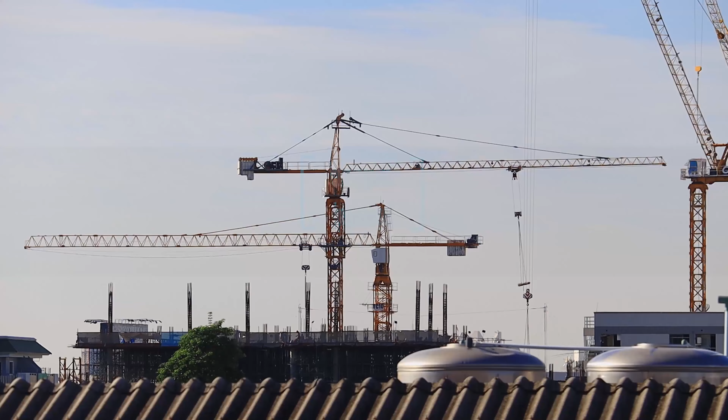Basically, these days, the trends are really changing when I talk of structural engineering. I understand most of you are into structural engineering, which is the analysis and design part. So I would say, with the given time now, these definitions of what a structural engineer is supposed to do are changing a lot. A structural engineer is not just confined to doing the load calculations, analysis, and designing the reinforcement and member sections and all.

So the scope has really increased in today's world. So many interdisciplinary things are coming up, and the way infrastructure has become so advanced, techniques have become so advanced, so the structural engineer also has to keep up to this. But of course, we have to understand that structural engineering is a very old art. It is one of the basic engineerings, I would say. Civil engineering is a very basic engineering.

Humankind, as we know from ancient times, had to build their homes and everything. So this art has been known to very ancient civilizations also, and we see these structures, which are all testament of the kind of skill a structural engineer has been having, and they're still standing today. We are talking of 2000 BC structures, and they're still there. So this is nothing but structural engineering.

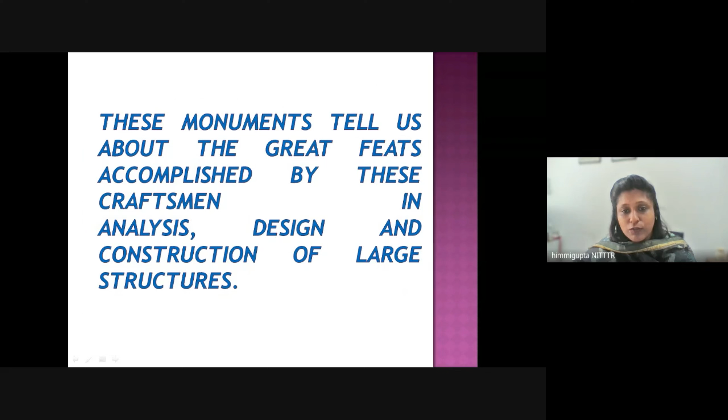Great buildings we still see: Sanchi Stupa, the Athens building, 2500 years old, Taj Mahal, 350 years old, then the Eiffel Tower. All these are marvels that speak of what a great profession structural engineering is, what kind of accomplishments we have been achieving. And in today's world also we can see how structures are coming up. We see houses, bridges, flyovers, high rise buildings, spacious shopping malls coming around us, and they're all structural engineering marvels. There's so much going into it.

So a structural engineer has to think about it; creativity is always there, of course, but we have to start bringing it out in terms of aesthetics also. Engineers, we are creators of artifacts. Original thinking has to be there, but again, constraints are put. You have to have affordability, economy, and practicability is another very important aspect. We have to tell all structural engineers that whatever you design, it should be practically possible to construct it on the site.

Okay, so now the modes are changing. We have to also understand about financing, project management, information technology. We see so many smart things coming around us. That is all IT, which is getting involved in the buildings, the structures. So, as structural engineers, we cannot say that we don't want to get involved in this. These are part and parcel of a structural engineer now.

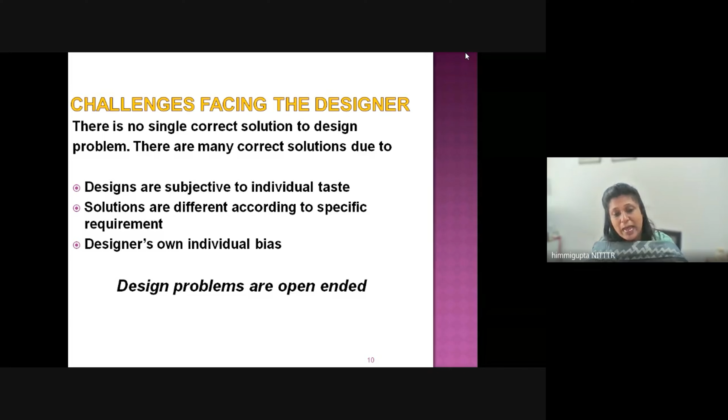There are many possible correct solutions. Of course, what comes in then is subjective design, which is based on individual taste and selected. Solutions may be for specific requirements, so the same solution may not be applicable everywhere. A designer has his or her own bias, their own subjective experience and thinking. So design problems are actually open-ended, with many possible solutions.

So within the constraints that we all know - cost, time, safety, and all those things - we have to come up with a design, an optimum solution. That is what is required. And that is where, these days, artificial intelligence is also coming up in structural engineering for optimization and these kinds of things. So we are not in isolation - any technology you talk of is now applicable for structural engineering also.

So this is a great profession. These are just words of a former president of the United States. Won't go into a lot of detail, but the idea is, what we civil engineers build and design stands in front of the entire community for the next 60, 70 years to see. So it has to be good work. We cannot hide our things under stitches, or hide our work under other things like other professions do. So civil engineering is something that is there in the open, and we should be very proud to show that yes, this is what we have done.

We cannot hide our work anywhere, it will be there. Plus we have this onus that people are using these structures, so safety of people and safety of property is another onus. I think the latest incident that happened in Gujarat, the collapse of the Morbi Bridge, has actually shaken everyone. That is a very classic example of what kind of big responsibility civil engineers have on them.

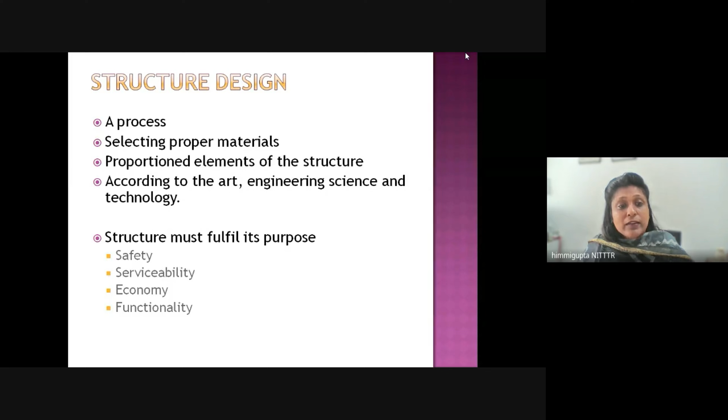We have to select proper materials, which is again another aspect where a lot of things can be done by a structural engineer these days. A lot of things are expected from a structural engineer - choosing the proper material. Then is the proportioning of the elements, and definitely it's an art, engineering, science - it's a technology. That's what we are using.

When I do structural analysis first, what I do is determine the effects of loads on the physical structure and its components, like the deformations, internal forces, stresses, support reactions, accelerations, stability. So basically the key part of engineering design of structures is the results - they are used to verify that a structure is fit for use. The idea is analysis helps us avoid some physical tests, which can otherwise be time consuming and very costly. So that's how analysis helps us.

Simulations, that's what we talk of, and these days these are becoming very common. I'll also share this as one of the recent trends - what structural engineers around the globe have started doing. We are using applied mechanics when we are doing all the analysis of forces, stresses, and everything. We are using material sciences - how materials are behaving, how concrete is behaving, how steel is behaving, any composite construction that we are doing. New materials are coming into the market these days, so all those things are related to material science, and applied mathematics is there too.

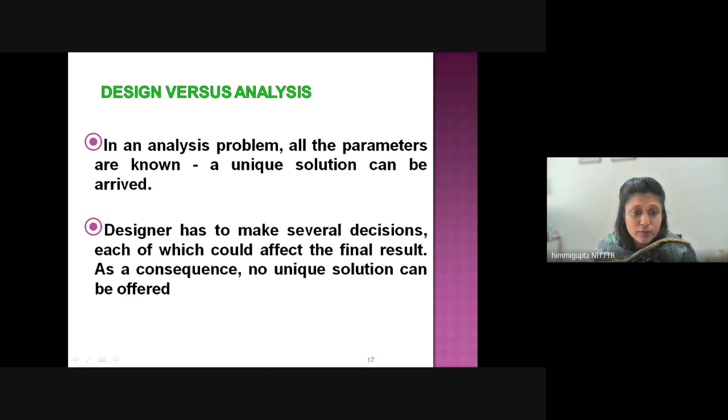When I'm doing structural analysis, I'm doing so many matrix operations, finite element analysis, solving so many differential equations, when we go for dynamic analysis and these kinds of things. So there's so much art, technology, and engineering involved for a structural engineer. Design, as I said, is open-ended, but in analysis we know all the parameters, and there is a unique solution. So these are the two differences between analysis and design. Of course, we have time limitations, cost and environmental constraints, and the building has to be fit for the purpose for which it is being built.

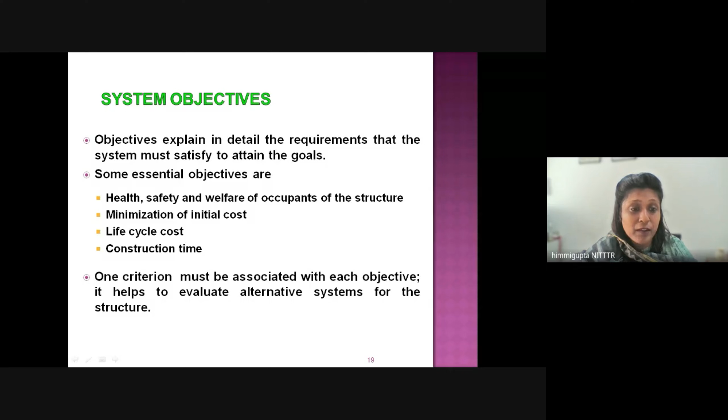Another very essential objective which has started coming up in recent times is the health, safety, and welfare of occupants. Especially COVID times have taught us how hygiene is to be maintained, how we have to keep everything clean and neat around us. Since buildings are used for so many purposes by so many people - in an office or college, we spend almost 8 to 9 hours every day. So health, safety, and welfare of occupants have become a core area of concern for a building, and the structural engineer has to get involved in this aspect too.

Then of course initial cost minimization is there, and another aspect which has picked up is the life cycle cost. One is the initial cost and one is the life cycle cost - throughout its life, what kind of costs will come. People have started looking into these aspects given the changes in environment that have come with excessive use, the way humankind has been tapping into the earth's resources. So we are falling short of resources now. Everything we choose - what material, what techniques - we have to look at their impact on the environment. We have to start questioning everything on that aspect.

I have to understand that I have to look for the best alternative solution if possible, optimized, which has all these things. Of course constraints are there for a designer. Sometimes the constraint is that the beam cannot go deeper than 200 mm. So we have to go for such design solutions to work within that.

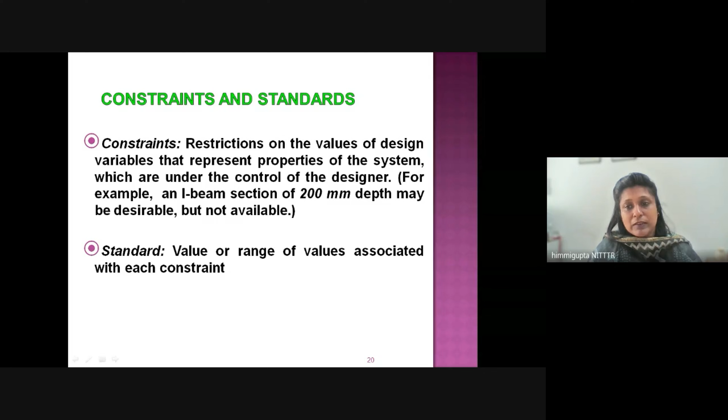Then there are standards, which are values or ranges of values associated with each constraint - like our IS standards, BIS standards, British standards, New Zealand standards, Euro standards. So basically most things are governed by that. The idea is to have some standard around which structures are built, so that these things can be regulated and there is some standard which is maintained.

Code specifications are of course helping us - they are the detailed set of rules and suggestions. As a structural engineer we should have due knowledge of all these codes, know how to use them, and know which are the applicable clauses for us. That's a very important part. If I'm missing a major load because I didn't look into the code and use it, that's a big oversight - I have overlooked something very important, and the structure is not safe.

Codes are formed by experts after a lot of research, adopted after seeing how buildings or structures have performed in the past, and these codes get revised regularly. So another important aspect for structural engineers is to keep themselves updated with the latest changes in codes - if some new revision has come, we must be aware and ready to use it. Recently, IS 875 and 1893 for loads were revised, NBC was revised, and very soon we expect a revision in IS 456, the code for RCC, which has also been long due. I think very soon it is expected to happen.

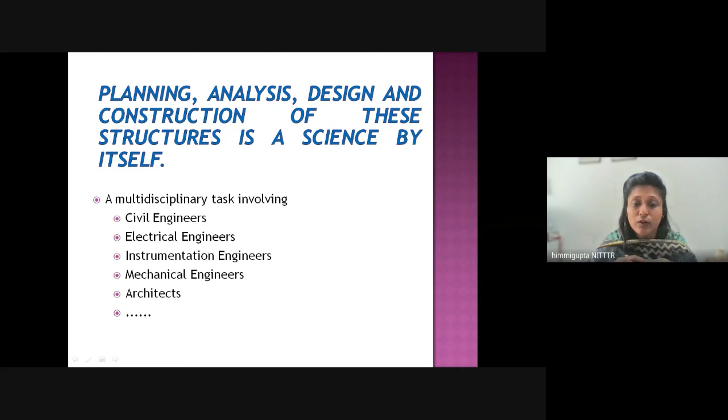Basically, we have to make it buildable. It's a multidisciplinary task - there is planning, analysis, design, and the way it has to be constructed. When construction happens, the structural engineer is always involved there too. The structure involves civil, electrical, instrumentation, mechanical engineers, architects, green consultants, regulatory bodies - so many stakeholders are involved, and everyone has to go hand in hand.

So, just starting with a few structural systems - there are so many structural systems available, which give us the variety to come up with such fantastic structures, the marvels. Definitely, knowledge of these structural systems is very important, and many of these keep on updating too.

We see high rise buildings, new types of buildings. We see signature buildings coming up, like the Signature Bridge in Delhi, or how they executed it. We have such beautiful bridges around us, new ones coming up, some have come up just recently. So new structural systems also keep coming up.

Of course, knowledge of basics is there, and of course how much creativity we can put into that. We have to see the feasibility, the functionality, the technology, and sustainability is the word. That's the need of the time, since our environment has been polluted too much by humans. So we have to keep in mind, whatever we build, what effect will it have on the environment. Our effect should be minimum on the environment.

Then innovation, of course, always has its plus point. Having innovation in any structure, as I said, can help in saving a lot of material also. Some new technique comes up, and with innovation, a good structure can become a revenue generator also.

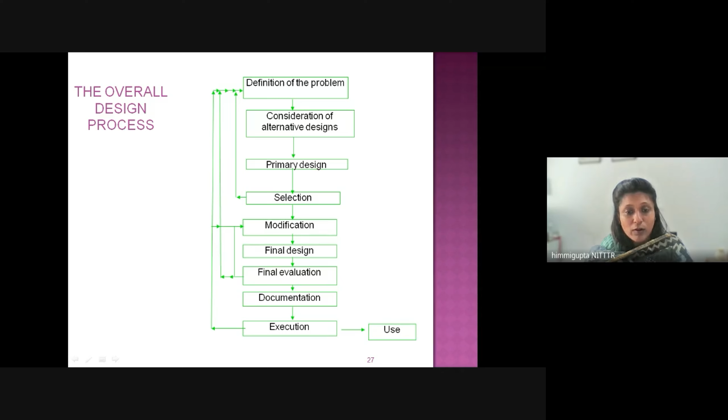Of course, the overall design process involves a lot of steps. We do primary design, we look at all the alternatives to work out the best one. It is not just one go that we finalize with, so we have to accordingly do modifications and everything until a final design is done.

So in the structural design process, when I'm talking of invention or modification of a structural system, what is required here is knowledge, experience, imagination, intuition, and creativity of the structural designer. When doing preliminary analysis, I should have a good hang on what is to be approximated, how it is to be approximated, the loads, the behavior. Then for proportioning members and joints, knowledge of design criteria and design codes is required.

When doing analysis, proper loads and how a particular member will behave under that load, this kind of behavior knowledge is important. Then for evaluation, design criteria and design codes become very important. So as we see, definitely in-depth knowledge of the subject is required when we are going for design, apart from the other things that have come up.

We design for strength, we design for serviceability. It's very important that the structure should be serviceable also. If people are not comfortable using the structure, it defeats the whole purpose. There may be deflections, it may not collapse, but there are high deflections and people are not comfortable sitting under that beam. Or you're riding on a bridge and there's an expansion joint sound coming again and again as you cross the span, which becomes a discomfort for the riders. All these things should be kept in mind when designing structures.

I won't go into details, of course, you're all teachers. So this is what I was talking of, durability and life cycle cost. This has become very important now, that structures should be made more durable, so that there is minimum material and minimum money being put into repairs and retrofitting. So it should be a durable structure. The life cycle cost is looked into, what will be the life cycle cost, not just the initial cost.

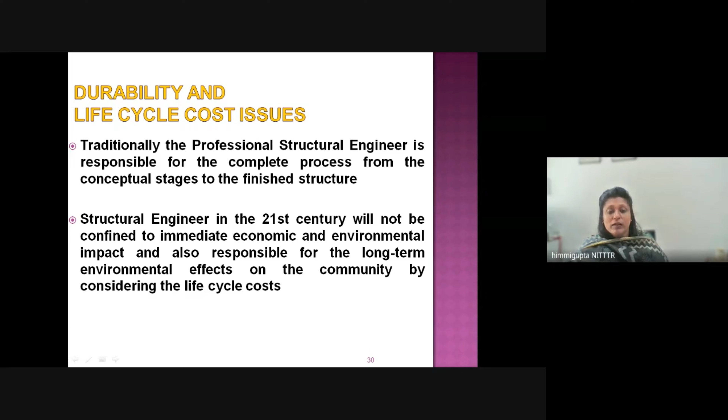So that is what is important these days. So life cycle cost analysis, LCCA, that is another very important aspect which every structural engineer now must know, so that when they start the design, the kind of materials they choose, the kind of structural system they choose, that should incorporate these things, because structural design is kind of the first step when a structure starts coming to life. So these things have to be looked into, very important.

Okay. So we have, of course, so much infrastructure to provide because of our population which is growing, and so much industrialization is coming around. So there's lots of infrastructure which is coming up, and definitely the infrastructure that now comes up should not harm the environment. That is the whole idea. So we have to provide housing. Then there is land contamination happening, water pollution, environmental degradation, climate change, ozone depletion, deforestation, acid rains. We are all feeling all these things.

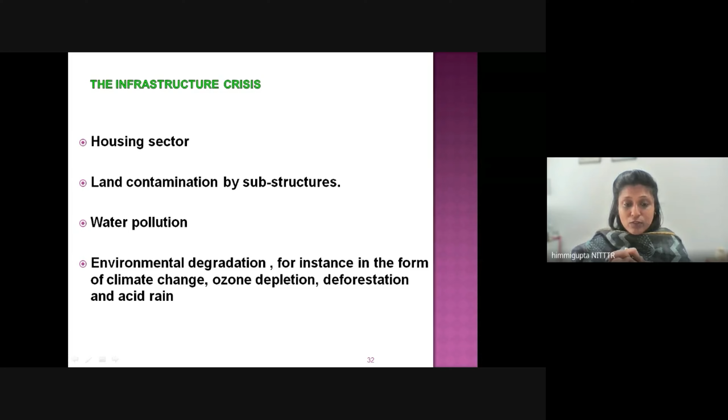The way climate is changing, the weathers have now kind of changed, not what it used to be earlier. The sardi garmi has become very different now. They are coming at different times. So all this, I would say structural engineering has been doing all the designs and all. So the infrastructure is a big part of all these changes. So definitely structural engineer has a big role to play.

Okay. So we have to understand that there are old buildings which have been around for a long time now. They are asking for repair and maintenance. So there are durability considerations. Their budget has to be allocated. So it is costing the economy quite a bit. So definitely this is another thing. So we have to understand that infrastructure, there is new to come up, there is old that requires attention. So there is a balance to be seen, and we have to understand that the new structure at least should be done in a right way.

Okay. So time is very important. Time wasted is money wasted and opportunities lost. Okay. So definitely design should be done in a way that it is easily operational on the site. Okay. So delays, anything that happens, that is basically we are losing on money and opportunity. So these days nobody likes that.

So owners, the contractors, as I'm saying, these days the trend is a full package that is called the AEC, architect, engineer, contractor. The same firm is doing it. So they call it AEC consultants, AEC companies. So the idea is to have an end-to-end solution, and all these things should be coordinated well. The design, the construction part, and the planning part, they have to be coordinated well.

Okay. And now, another thing that is coming up is to have alternate materials so that we can have cost competitiveness in our structures. So, especially India, we are a concrete loving nation. Okay. So, we have to start understanding how we can bring in more alternative materials in concrete itself. I will share in some time how concrete has grown immensely with the new kind of interventions that have come with concrete. So what kind of options are available? The structural engineer is the person who has to bring in that material to the structure. Okay. So we have to look for the best optimal solution, how we can bring down the cost. These days there are so many materials which are available.

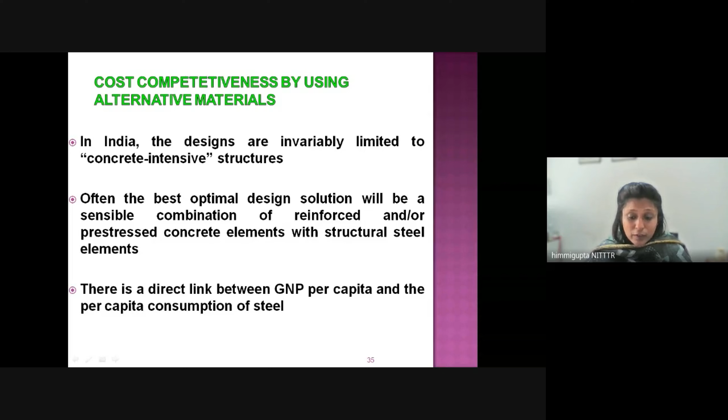So definitely, steel is another very good material which is recyclable. It is a sustainable material, it is a green material because it can be recycled and used again and again. And of course, use of steel is related to the GNP also, the growth of economy of a country. So that has to be there.

Okay. So for life cycle cost, there are various codes which are available. IS 14000, 17000 series are also there. ISO, and these days even online portals are available which are helping you do life cycle cost analysis. So whenever you're picking up a material as a structural engineer, you have a look into its LCA, what impact this material will have before you choose it.

Okay. So of course, as I said, there is a cost also involved, not only in building it, in maintaining it, but also in dismantling the structure. The cost is involved, and then whatever is the salvage value that we get out of it, this total number becomes the life cycle cost. So we have to look into the entire aspect these days. Okay.

So initial cost, of course, there are so many things we know as it goes into construction and everything, design and everything. Okay. So just showing a few pictures that I mentioned earlier. When we build a structure, the community should not be inconvenienced. So that is something that has now again started picking up, but of course that needs a lot of attention in India still. But in other places, this is taken very seriously.

It's not that some flyover is coming up and for many years now the traffic is diverted. People are getting delayed for their office and everything. Commute time has increased, so these things should not happen. We have to arrange ourselves on the site.

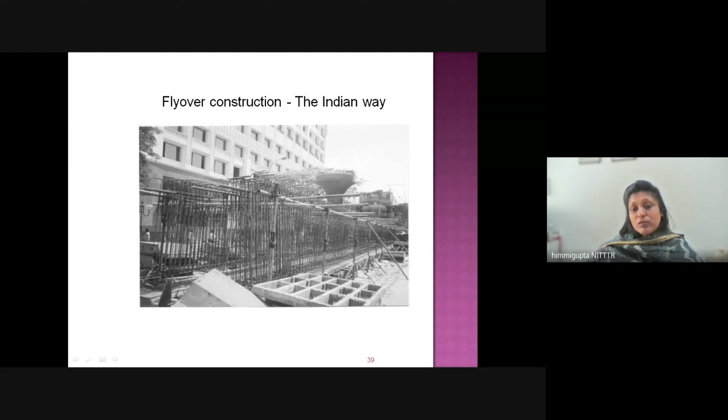So with proper planning, with proper coordination among all the involved parties, like various engineers, contractors and everything, these kinds of things can be planned beforehand, so that this happens in a timely fashion, in minimum time and with minimum disruption on the road. That's what we're looking for.

Okay, so all these kinds of things are not liked by people anymore. So we have to look into this aspect, and the structural engineer will be a part of this kind of planning to ensure that this should not happen. Okay, so we have to make sure we are not inconveniencing society. So I'm sharing some pictures which a friend from Instagram had shared once.

Okay, so periodic maintenance cost is also, of course, there. This is something I think is a neglected activity in India. There are so many examples of what has happened because maintenance was not done properly. So that is also very, very important. Everything that is functioning requires maintenance. So structures also need to be maintained properly. We have to look into proper maintenance, and whatever repair or rehabilitation is required has to be done.

So we have to understand that concrete cannot last forever without maintenance. It requires maintenance. And it's not that concrete bridges outlast steel bridges. In fact, if you look in India itself, there are many old bridges built in British times which were steel bridges, and they are still working quite nicely compared to some modern concrete bridges. So we have to understand what type of material we choose for what kind of solution.

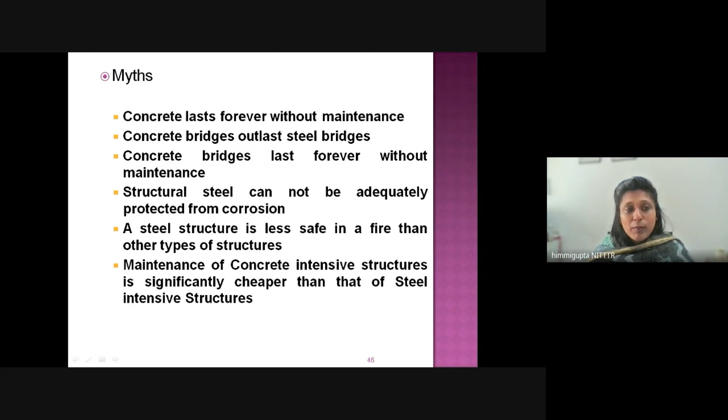It's not that concrete is not good or steel is very good, but we have to see what our requirement is and how best we can come up with the solution using the best material for the place. So all these things have to be looked into, of course. And all these aspects are also there for life cycle cost. So a structural engineer has to look into all these aspects.

So the everyday life of a structural engineer is designing structural systems, how to assemble the components, and what kind of design requirements are there. So this is how a structural engineer goes about things. Generally, as structural engineers, what we should be careful about is that many mistakes happen because there is a lack of conceptual clarity on what has to be done. Lack of visualization. We need to visualize how the structure will look at the end.

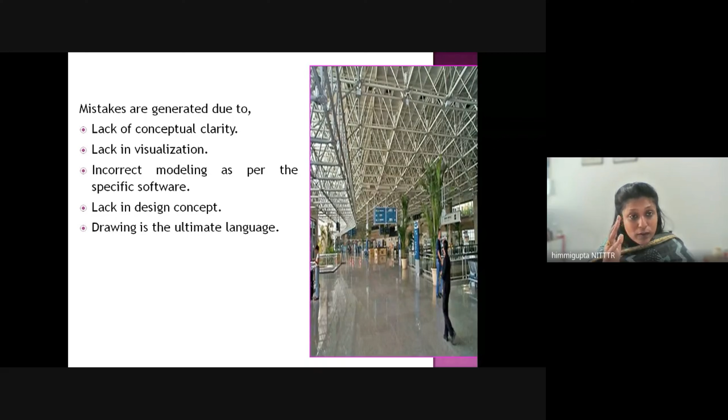Many times there is incorrect modeling in the specific software. Then many times there is a lack in design concept. And we have to understand that ultimately it is the design drawing which is our language, how we communicate. Nobody will be looking at thick notebooks of design calculations. When the structure has to be built on site, what will go is the drawing. So drawing is something a structural engineer has to put a lot of attention into, because that is his design communication to the outside world.

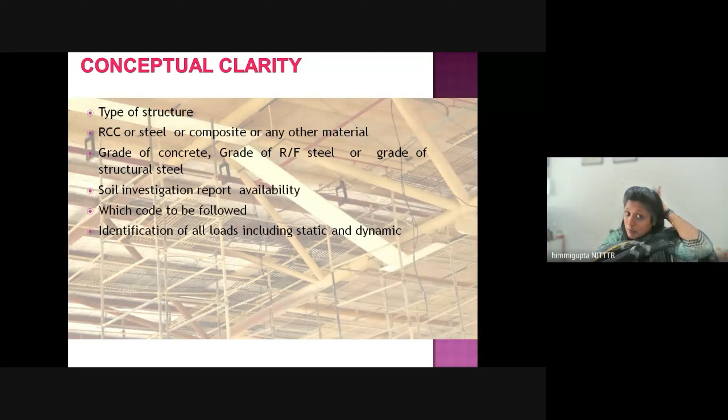So when I'm talking of conceptual clarity, what we mean is that we should know what type of structure is coming up, what kind of material should go into it, RCC, steel, composite, or any other alternate material. Then what grades or particular properties of the material we pick. Soil investigation should be available. That is very important. A structural design cannot happen without it. We start from foundations, and this is the first thing which has to be there. So don't start a design until you have this kind of data.

Which code is to be followed? That's very important to understand, and then identifying all the correct loads which are applicable for the particular design. So these are very important things.

We have to be very clear about our concept of what is to be designed. Then deciding the method of analysis, what kind of analysis method we want to go with. These days we are going into more advanced methods also, which I'll show you in some time, the performance-based design, going above and beyond the limit state design. Now, India is also moving towards that.

And then type of cladding, the construction aspects, we have to have ground clearances. What will be the method of construction or erection, the sequence, that will matter a lot. Say I'm designing a bridge which will be six spans, and I haven't considered that, because of the construction sequence, there will be a time when the full gravity load will not be mobilized, and there will be other kinds of cantilever loads coming up due to partial construction stages, and the structure might fail at that point.

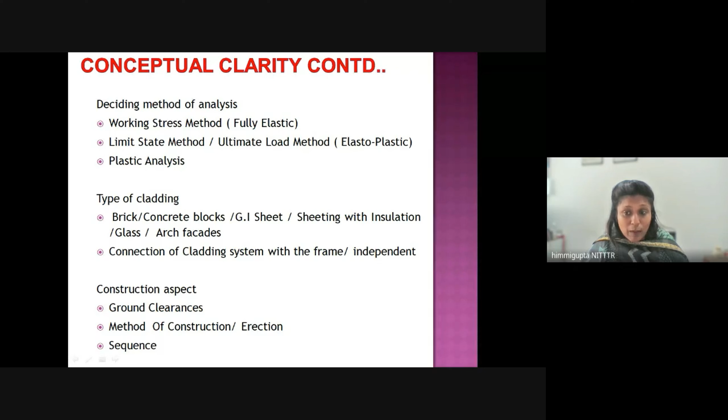So I have to look into all this. I cannot just close my eyes to how construction will happen. I have to have knowledge of that. Then visualization: the entire geometry is finalized, including stair, lift, opening, offsets, types of connections, critical load conditions, what will be the deformation shapes, type of foundation, especially underground structures, machine foundations, space structures. I have to take care of all these things. I have to visualize how they will come up on the ground. So accordingly, they have to be designed.

Then in analysis, what kind of software I want to pick up. What kind of support conditions, actual construction, what are the conditions. So I have to do the best estimate when I'm doing the analysis. So all these kinds of things we have to put in. So definitely understanding the software itself, say STAAD, there are many concepts. These days there are so many softwares, MIDAS and everything. Every software of course has a basis. The basics are still the same, whatever the software may call it.

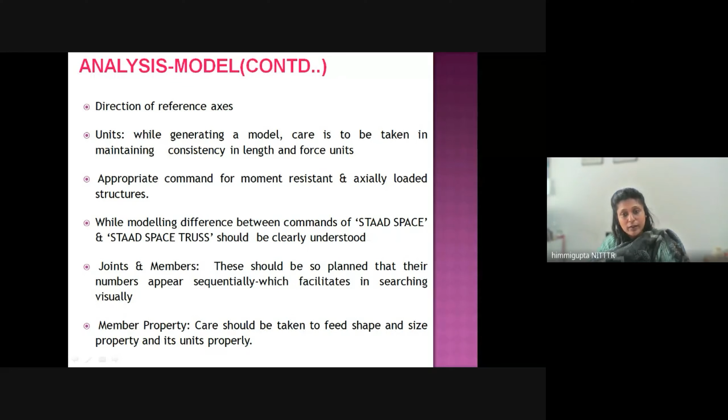A bending moment is still a bending moment. A torsional moment is still a torsional moment. So those things haven't changed. So when we're using a software, we should fully understand what it's doing. We should do our own checks also to see whether the numbers it is giving are correct or not. So all these kinds of things should be taken care of. Joints are very important. Many times you're not paying complete attention to that. So joints are important, and the drawings, how we make them.

So our students who are going into design, we have to teach them how to make drawings also. Not only make drawings but read drawings, what kind of notations are there. As I said, drawings have to be very clear. There should be no ambiguity, no confusion, so that the correct thing is executed on the site. So all these kinds of things are very important. When you're doing a design, you must know the fire protection, operation, maintenance, cost, installation of ventilation, heating plants, where will these happen? Because again, these are another type of loads, if it is going to have a lot of vibration or something. So we must know all these kinds of things.

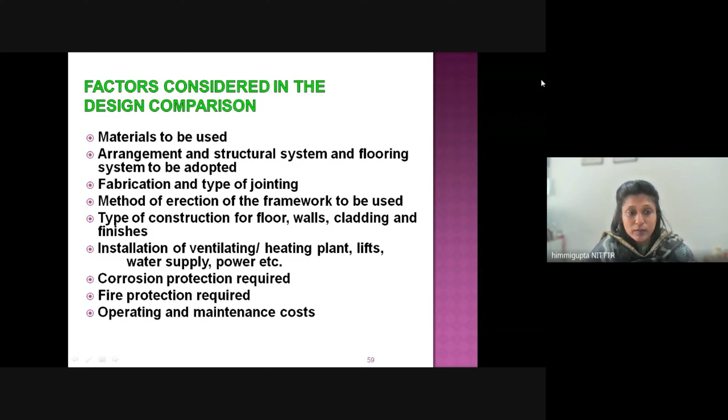So of course, usual problems in structures: leakage, corrosion, excessive sag, peeling of plaster, differential settlement, sometimes excessive damage during an event, or partial or complete collapse during construction. These are the usual problems in structures. And with the proper LCA, we should be able to understand that this will come, and beforehand we should be able to put a solution to that so that it doesn't happen.

So even the owner these days is very smart. The owner wants to know what guaranteed performance of the building they can expect, how much damage will take place, where it will take place, and if it happens, what will be the downtime, when the building will be closed and they won't be able to earn what they're earning from the building use. What will be the cost of this kind of thing? So there is more accountability, more efficiency, and the engineer has to be more specific these days. So we should be able to answer all these questions.

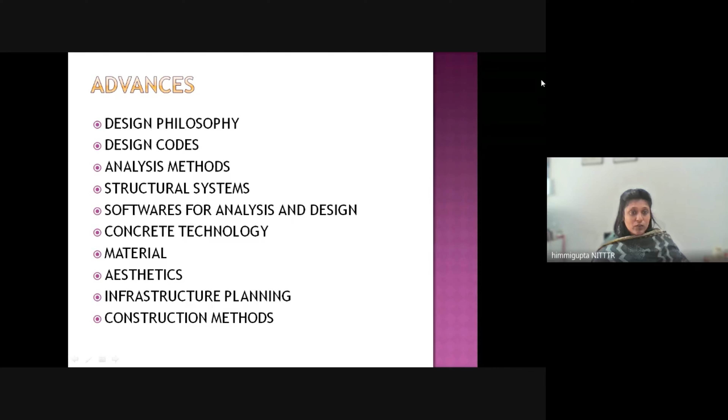And there are so many tools, of course, that are coming, the advances which are there, like design philosophies, they are advancing, codes, analysis methods, structural systems, the softwares, the materials technologies, even concrete, as I said, aesthetics, infrastructure planning, construction methods, everything is advancing, so that these things are becoming better and better. And of course, in another 2-3 years, India will be the fourth largest infrastructure project market in the world. So there is so much coming up.

We hear so many projects these days. So we have to have our technical workforce. It should know the latest technologies. Our students, who are going to go to the industry in another 1 year, 2 years, should be equipped with good knowledge and good basics so that they are able to grasp everything and perform.

So we are talking of fast track techniques in building and infrastructure projects. Definitely we cannot go by old methods now. These days, everything is fast track. Things have to be done fast in the minimum time. Just to start, this is now I think the latest trend. We all must have heard about it. 3D printing. So this is basically an additive manufacturing technique. It is a very new building innovation. It is becoming more common in structural design and construction.

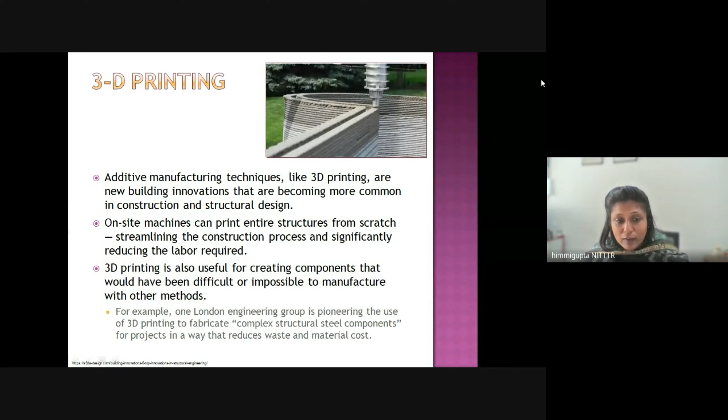So basically, what we're talking here is on-site machines. They can print entire structures from scratch, which streamlines the construction process and significantly reduces the labor required. It has been shown to be very useful in places where it is impossible to manufacture some specific components otherwise. So 3D printing has been able to do that. One example is in London, wherein they used 3D printing to fabricate a complex structural steel component. In that way, waste and material cost were also reduced.

So except the horizontal slab members, the entire building was 3D printed, cast in situ at the job site in an open to sky environment, and they used 106 printing hours, and a fully automated 3D printer was used. So these kind of technologies are now coming up, and this is something we should all know.

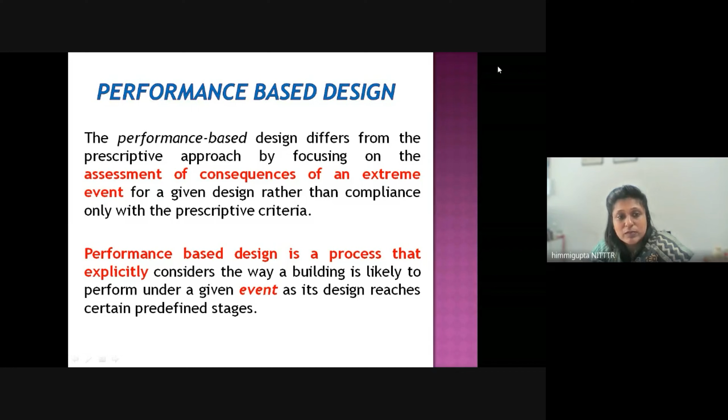So from design philosophies, the old ones, working stress, ultimate limit state, so many things have happened, and now we are going beyond prescriptive criteria: how much damage will happen, where will it happen. What the world is now talking of is performance-based design, which is actually talking of satisfactory levels. It is basically not a prescriptive approach. It focuses on the assessment of consequences of an extreme event. There are various stages which are defined in terms of performance indices.

So definitely, this is something which will be coming up very soon in India also. Europe and others have already adopted it long back. What we hear is the new IS 456, which will be coming up, will now be based on performance-based design. So we can, of course, start looking into this also. This is what India will be using soon as well.

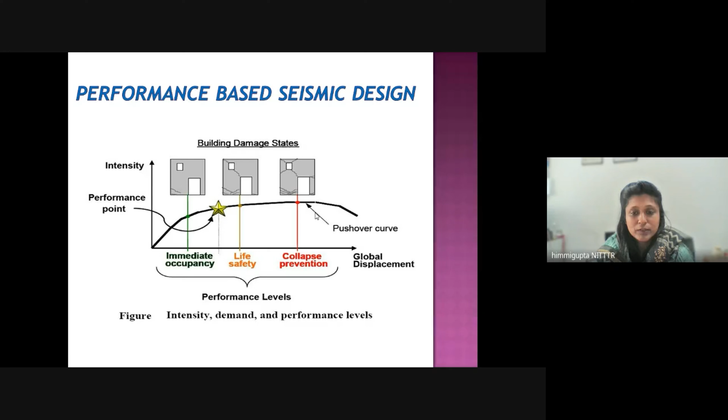That's the performance curve that is used, the deflection-load curve, from the pushover analysis which is done. So whether the damage happens, the building will be in a state of immediate occupancy, life safety or collapse prevention. Accordingly, we say how it will behave and how much damage will happen. So these are some of the things. I won't go into details. Please have a look at them if you are interested in this topic.

So these are the various structural performance levels which are defined. Pushover analysis is what comes in handy here. Most of the software available offers pushover analysis, ETABS, STAAD, any software you name, they are offering this. So we need to get conversant with this also.

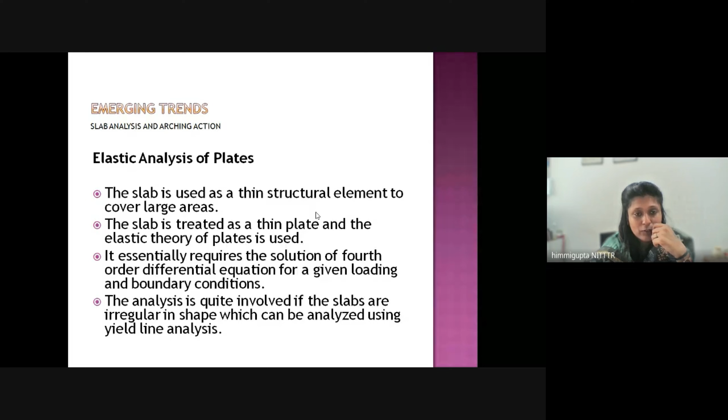More emerging trends are slab analysis and arching action. These kinds of innovations are also coming up. Yield line analysis, wherein slabs fail with different patterns of fracture lines forming segments. Fracture analysis is coming up these days. People are using FEM in many ways these days, fracture FEM and XFEM, extended FEM, wherein they are making assumptions of the crack and everything. So yield line analysis has also picked up a lot now.

Many softwares are there, but we have to understand that software is there to help us, not to replace us. The structural engineer's judgment of what is correct and what is not correct has to always be there. We cannot just blindly rely on the software. We must be able to understand that.

Now, another trend, which is, I would say, the most sought after trend these days, is BIM, building information modeling. Basically, it is called a 4D thing. From 3D, they are adding a time element to make it 4D. It is also called an integrated digital platform. Most companies are using it now.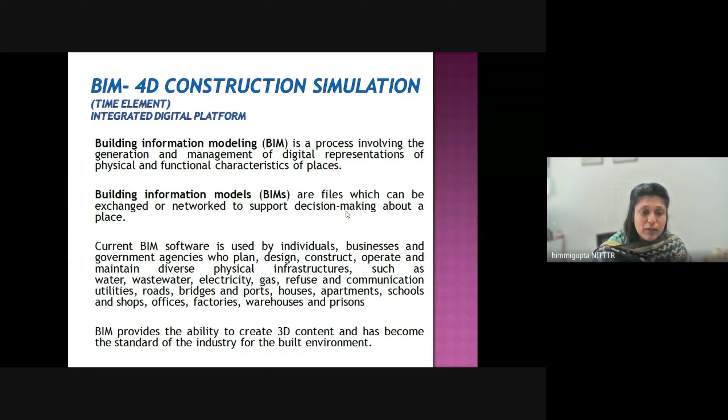The idea is that there are files related to the building when it is being planned, designed and during construction. These files can be exchanged on a network among the various fields involved, electrical, mechanical, civil engineer, contractor, structure. They can share the files on a real-time basis. They are made like layers in AutoCAD, so decisions can be made very nicely. This is now the standard of the industry.

There are many courses coming up now. People are doing diploma and postgraduate courses in this. This is the demand of the industry now, so if you are conversant with BIM, the industry definitely has a place for you. We are basically creating 3D content here, but the content should be of quality 3D so that it can be robustly used for construction. Design teams have to hand over the electronic BIM information significantly.

If I'm making a BIM file which is a general information file versus one to be used for design later, with model geometry, metadata and everything, the kind of details would be different. So I have to keep in mind what kind of data I am supposed to include. Primary building components in the design phase don't have integration of secondary members, and no detailed modeling is there. So I have to understand what kind of file I'm creating at what time. BIM has to be used very intelligently so that it can serve its full purpose.

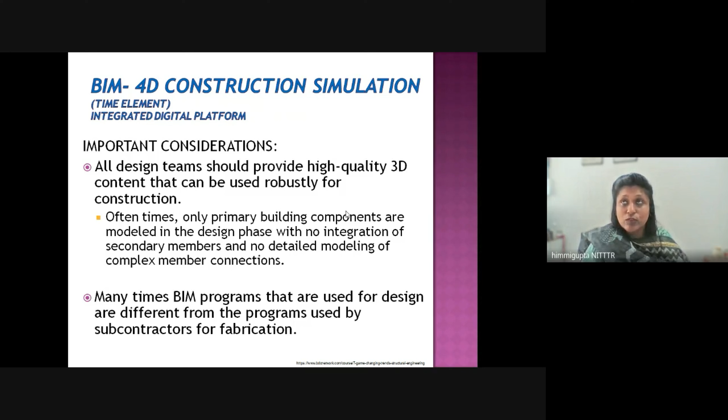Many times we also have to understand what BIM program the design engineer is using. Sometimes contractors or fabricators are using a different program, so when they take your data into their program, there might be some ambiguities and they might not jive with each other. These kinds of issues also have to be looked into. AEC companies these days are tackling this gap by taking the steps necessary to create advanced model-based deliverables.

Revit is one example of BIM software which is very widely used in India. Even many of our ME students are doing a lot of work on Revit now. Basically, we have to have precision in the modeling so that all the teams can rely on it. Primary, secondary, complex geometry, this kind of program has to be done.

Even many times now, what is expected is that a structural engineer who has designed the structure should directly work with the fabrication person also. There are programs like Tekla for fabrication level, so that there is no disparity in data, and the data is correctly transferred to the fabrication team and the design is properly executed. So as a structural engineer, you'll have to constantly be in touch with the fabrication team also to solve their queries and everything.

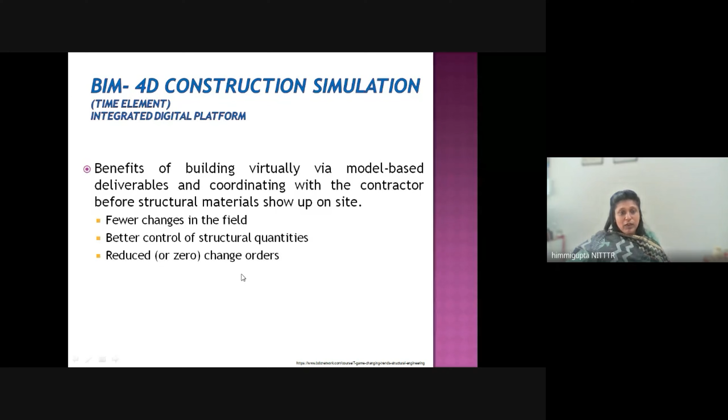So if you have already coordinated with them using these model-based deliverables, fewer changes will happen in the field, there's better control of structural quantities - our aim is minimum quantities for material - and there will be reduced or even zero change orders for the material you're ordering. So definitely there are good things to achieve here, and many big AEC companies are making their own integrated digital platforms.

Another trend that is now picking up is visual programming and parametric modeling. Let's understand what visual programming is. When I'm doing an individual design program, that scope is quite narrow - there is little or no connectivity to hundreds of other design processes that take place on every project.

So what happens is the engineer designs beams in one program, then manually transfers information to drawings or to BIM. Then they use spreadsheets to design footings, pile caps, dozens of other structural elements, and that critical data is then transferred from one place to the other.

Now what savvy engineering firms, AEC firms, are doing is developing their own in-house programming capabilities so that they can customize or mold commercially available software and create their own programs to do what they need to do. If a company knows they are regularly doing these kinds of projects, this is their way of doing it - this is how their team has been structurally organized. So whether in-house or commercially available, software is being changed to meet their own needs.

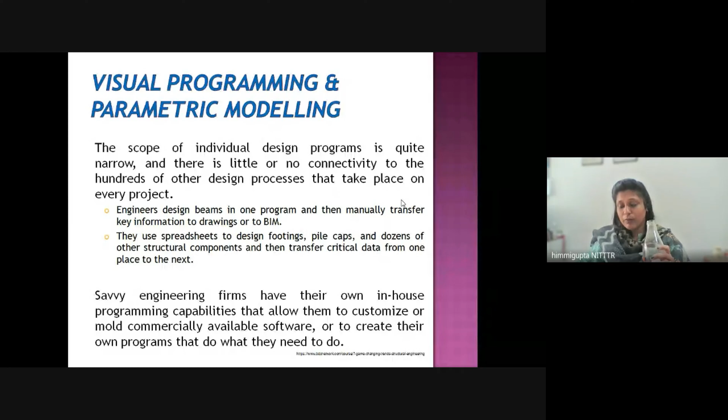So there are platforms such as Grasshopper - this is one name which I found. This is a visual programming interface, a programming logic which is very easy to understand and implement. Basically, what engineers do is write simple programs that connect the very disparate, isolated processes, and improve the speed and efficiency of the design process. So visual programming is also coming up these days now.

Parametric modeling is basically the idea that I'm trying to establish what are the parameters of a design which can be varied. Then I set a criteria for how these parameters can vary. Then I can do multiple analyses to obtain the final design of the system over the entire range of the parameter space.

So this can help me very quickly vary the depth and spacing of steel trusses for an airport terminal, so that steel tonnage is minimized. This kind of parametric modeling can be easily used when a client quickly comes to you asking if an option is good or not. If you already have a parameter set and this kind of visual programming set up, you just vary those parameters and quickly come up with a solution, and share it with your clients. These preset models help a lot.

Now another thing happening is integration of multiple services with the core structural engineering, which I've been talking of from the start of this lecture. There is definitely specialization happening in AEC. As I told you, people are now coming up with AEC firms, not isolated structural engineers or isolated contractors. Individual consultants have their own deep expertise, and architects and engineers are pushing their boundaries of design, with so many aspects getting added.

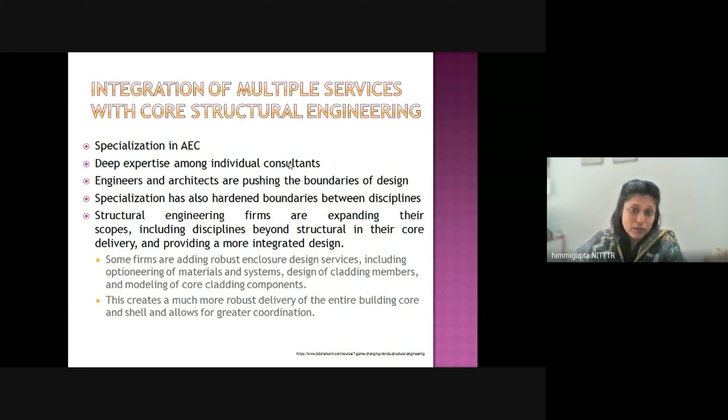Of course, boundaries have also hardened between the disciplines. So structural engineering is going beyond structural, beyond their core delivery, providing more integrated design. They've added robust enclosure design services, optioneering of materials and systems, giving options of which material to choose, design of cladding members, modeling of core cladding components, for a more robust delivery of the entire building core and shell, allowing for greater coordination.

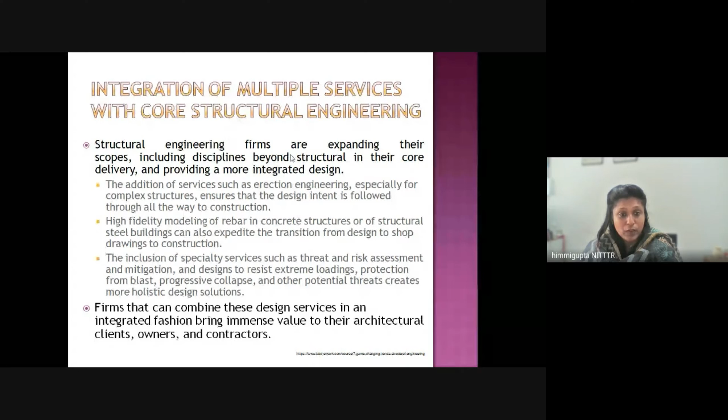So now structural engineers are also adding to their scope things like erection engineering, especially for complex structures, since it's important to understand how it will be erected in the design. Then there's high fidelity modeling of rebars in concrete structures, and threat and risk assessment and mitigation, covering extreme loading, protection from blast, progressive collapse. All these things are coming together as holistic design solutions.

Now another trend coming up is a single model for design. Traditionally, designs were developed, documents created and given to contractors, who would recreate or make changes with different information. Now this is being changed. The idea is to have collaboration between the design team and contractor so that a single model is developed which can be used by both parties, saving time and money.

This has been demonstrated where a project that traditionally took 30 months was completed in 2 years. People are updating the software too, going for real-time tracking, resource management, and enhancement in project management. Structural engineers are part of it too, with people going for cloud-powered solutions, since cloud and data sciences are being used for all these things these days.

One example has been demonstrated recently where information is scanned by laser within a short time and then stored safely on the cloud where it's accessible to the design members. Any information about the site is scanned by laser and made available in real time to the designer. You don't have to wait for someone else to relay the information manually; real-time data is now coming up on the cloud.

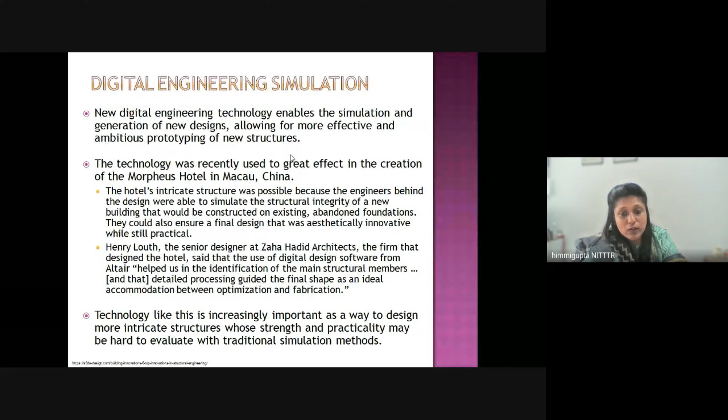Okay, so that's how these kind of things are now also coming up. Simulations, digital engineering simulations, they are also becoming very important these days. Okay, I've already told about aesthetics, I will not go into that.

Okay, so coming to RCC, as I said, concrete has its own challenges, design requirements. Concreting on site is an example challenge, of course, one of the most widely used material. So people are going these days for ready mix concretes also. So many advances have happened in concrete technology in terms of the materials which go. Recycle and waste materials are being used now. Mixture proportioning, mechanical properties, durability, concrete test, construction control, all these kind of things, advances have happened.

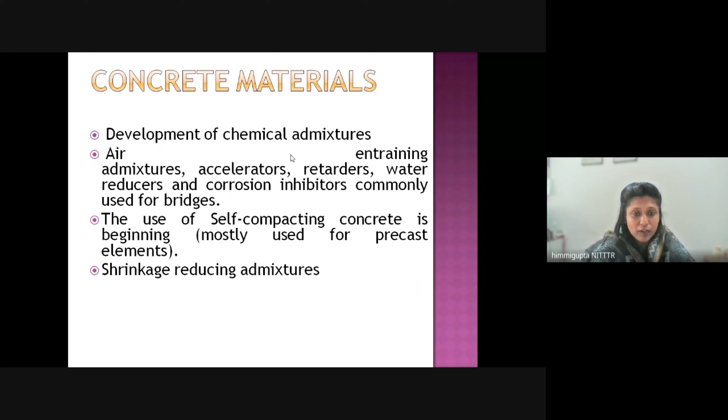Okay, so admixtures, air entraining admixtures, people are trying to reduce the water requirements since water scarcity is there. Self-compacting concrete people are going for so that there is less honeycombing, less defects in the construction, shrinkage reducing admixtures. All these kind of GGBS people are using alternate materials, waste materials, geopolymer concrete we are hearing, wherein no cement is being used, it is all polymer chains. Since cement, they say manufacturing has a lot of carbon footprint in it.

Okay, so natural aggregates, people are trying to replace those with recycled RCAs. They are becoming very common, recycled coarse aggregates. So all these kind of things, fly ash, all these things, silica fume, they are coming into place now. Okay, I think I'll quickly go through these.

So even tests and all, they are coming up, new ones they are coming up, which people are using. Okay, so construction control better is happening. So there are advancements in concrete also.

People are talking of high performance concrete these days, wherein for a given particular performance characteristic, special concrete is developed. Like, say, you want to have some placement and compaction without segregation, so you specially develop a concrete for that. That is high performance concrete, or an early age strength, or enhanced mechanical properties, freezing, thawing. Something that you require high resistance. So these are high performance concretes which you can develop for a specific requirement.

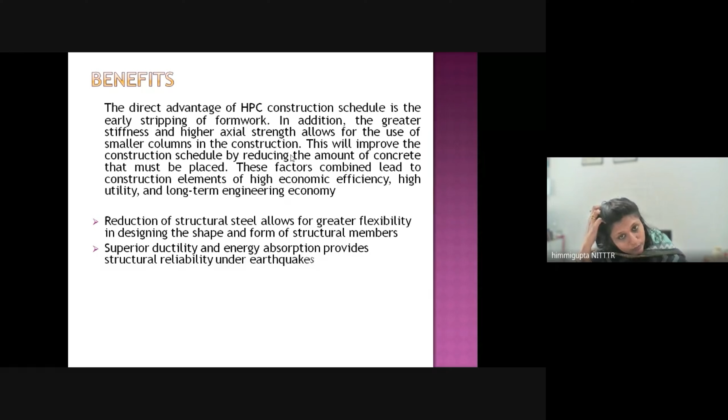Okay, so these are some of the things which can be there, and there is a lot of application. I think we're all hearing about it now these days. Instead of high performance concrete, people are even gone to ultra high performance concrete. So any superior ductility, energy absorption, less steel, corrosion resistance, all these things come up into play for the characteristics.

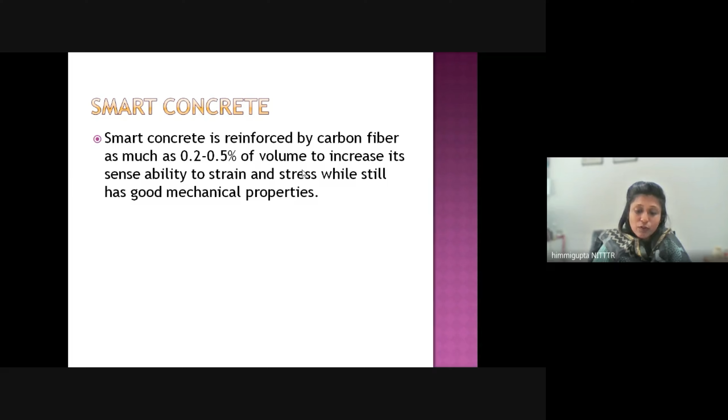Then RPC, another very high, ultra high strength, high ductility reactive powder concrete. The idea is to use very fine particles and less of coarse aggregates. Okay, so these kind of things, translucent concrete, light transmitting concrete. So they have optical fibers which are put into it. Okay, so there are many options.

Self-compacting concrete, as I said, not vibrations required. Lightweight aggregates are being used. Okay, so that is also good, so that natural material is used less. Okay, and most of these, performance wise, the research which is already available, so we can make a choice of which one can be good for our case.

Okay, decorative concrete, stamped concrete, these kind of options are also coming up. Then a different type of carbon fiber reinforcement, carbon fiber post tensioning, gels to replace water. These kind of things are coming.

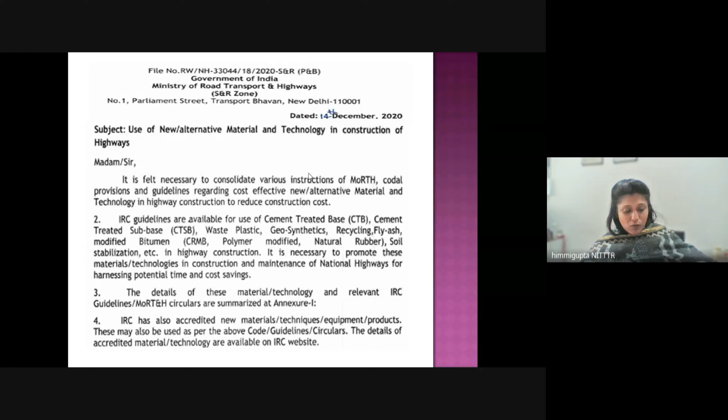Government, 2 years back, they already gave this notification that alternative materials and technology should be used in highways. So all these things, if you see, they have listed out. So of course, the idea now, as I said, is to use alternate materials so that cost can be brought down and also minimum harm to the environment.

The idea is, when we have to construct buildings, to design and construct them quickly without sacrificing their integrity and safety. So especially for commercial units, buildings where box units are either stacked or set side by side, this construction becomes very helpful, and there is a lot of focus on these kinds of things, especially residential mass housing when we are doing affordable housing.

And in fact, I would encourage all of you to also look into the lighthouse projects, wherein for affordable housing, six technologies have been chosen and they are being demonstrated in six cities. Government is trying to demonstrate how in a period of 1 year many thousands of houses can be constructed.

So they're using technologies like precast construction, steel, hollow sections, and all these kinds of constructions are being demonstrated. So please go to the website. You can put LHP, lighthouse projects. You'll be able to find all of it, and they are constantly posting what development is happening.

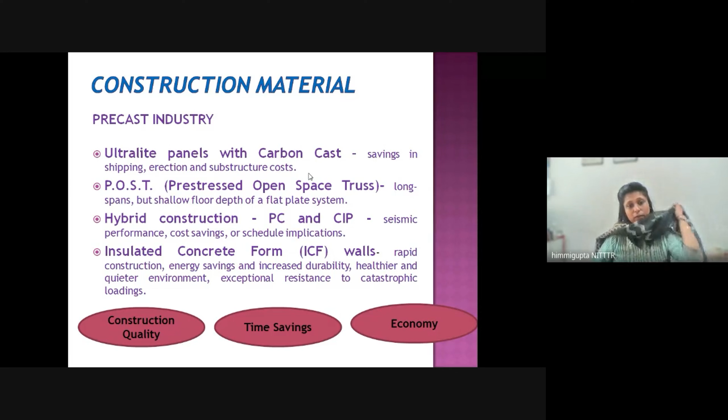So this precast can be used in many applications, as we can see: open truss, hybrid construction, concrete, insulated concrete form walls. So this is an emerging trend, of course, but when we're going for precast, there have to be some considerations for a design engineer, and definitely the joints are very important here, because that is where elements are ultimately joined on site. So design of joints is very important.

So the knowledge needed by a structural engineer is progressive collapse, diaphragm action in floors, joints and connections, detailed structural systems, constraints and considerations in precast manufacturing, precastability; all these kinds of things should be known to the structural designer. So they are very popular these days. They are being used for all these applications, as you can see.

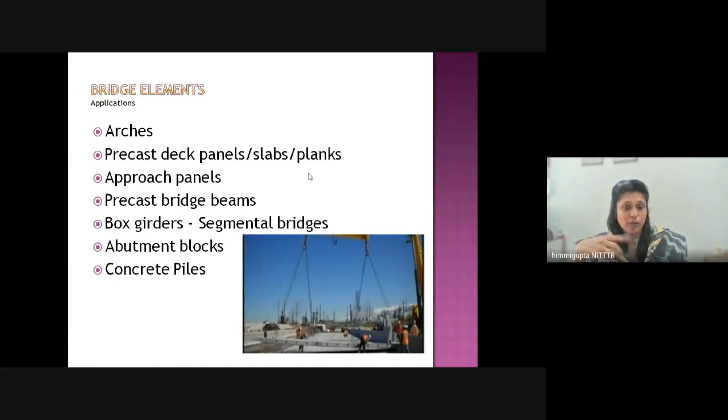I've already written them: for bridges, all elements they are using. In buildings and garages, they are using it for storage, for drainage and water treatment. Various applications are there. Highway applications are there. Landscaping, they are using it. All these are precast elements. Then noise control, even soil retention, underground utilities.

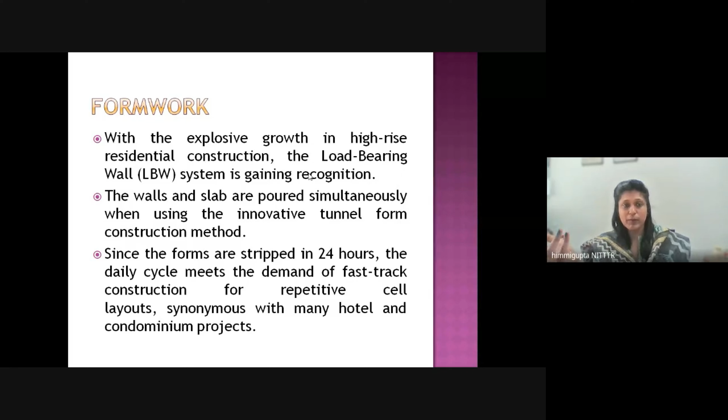Now, other than that, even formwork is getting better. There are more applications for formwork. People are going for LBW systems, fast track 24 hours, which can be reused. So formwork has become better now. The tilt-up industry is reaching new heights, almost 100 feet they have done with load-bearing walls. So that is the tilt-up technology. Please look into this also. So these kinds of things are coming up.

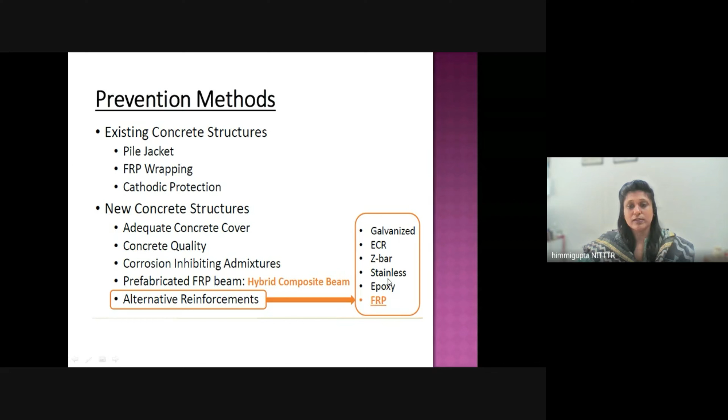Reinforcement, as I said, people are going for fibers also now. Reinforcement carpets are coming up. So corrosion issues are there, and these prove to be very good. So as we can see, reinforcements apart from steel, now galvanized, ECR, Z-bar, epoxy, FRP, are also becoming very popular. Even in FRP, fibers can be glass, carbon, aramid, basalt; even natural fibers are also used. So they have their own advantages.

It has a true biaxial behavior, which is uniform in any arbitrary direction. And forces are very easily distributed because of these plastic balls. So yes, this university in Toronto has demonstrated this, with a reduction in mass also. So these are the kinds of technologies which a structural engineer needs to see.

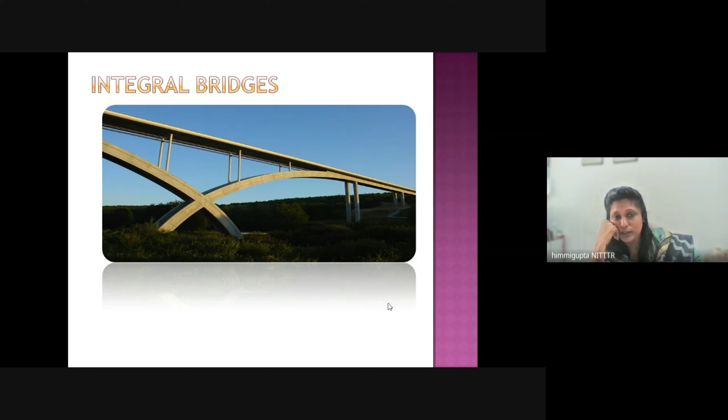Now, another good technology I would definitely like to mention is integral bridges. I think we are all starting to see this in India also. So what we see here is beautiful bridges. The idea is the pain part, which is always there, the connect between the superstructure and substructure, which is the bearings, for which maintenance is an issue. So those have been completely done away with.

So we don't see any bearings here. Superstructure, substructure, there are no bearings here. So these kind of bridges are also an innovation. They look sleek, nice. We are saving material. We can go long spans. Okay, they are very pleasing also.

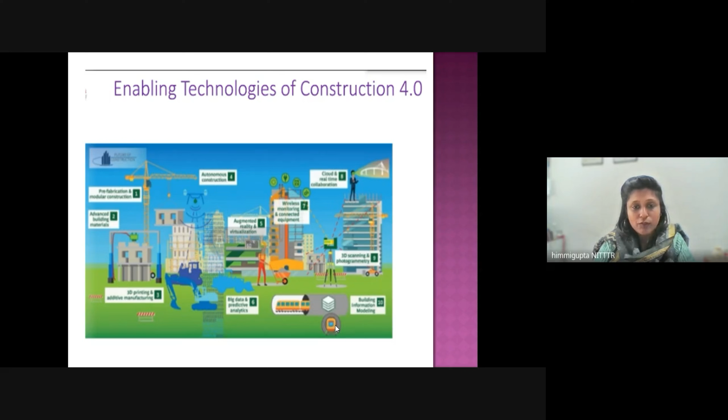Advanced building materials, autonomous construction, 3D printing, big data, all these kind of things. Now we are talking of construction 4.0, wherein everything is connected via internet, via Wi-Fi. So everything is being monitored on a single platform, and we can save a lot of cost and money. So design is also an important part of it. Okay. So IoT is now in construction also, and this is one aspect where we all have to start learning.

Okay. Since I know the trend now is for tall buildings, especially recently India had also released in 2017 a code, IS 16700, which is for the structural performance of tall buildings. So these are definitely the trend, the tall buildings. So there are a lot of things to look at here also. For a structural engineer, its height is affected by lateral forces such as wind or earthquake. So I have these secondary P-delta effects coming up.

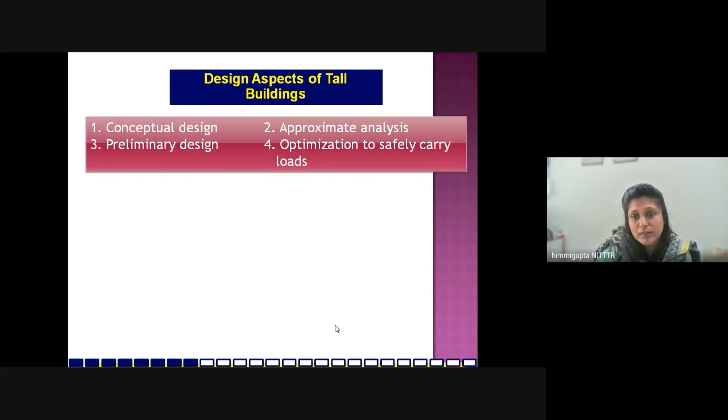So tall buildings have already been there, and more are coming up now. In India also the trend is rising. So there are different aspects apart from a regular building which have to be seen in this: strength, stability, design criteria. Human comfort is very important here, because we are talking of high rise. People are very high in altitude, so they have to have that comfort level also. Okay, drift limits have to be kept.

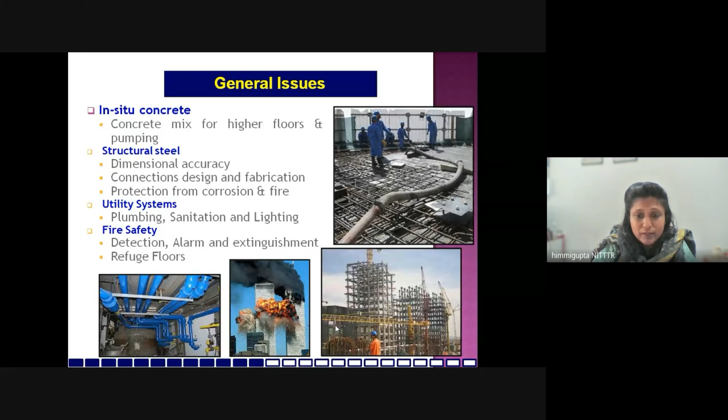So these kind of structural systems are popularly used. As structural engineers, we should have knowledge of these kind of things. Okay. Of course, issues are there. People have to work at heights, the workers and everything, accidental loads, all these kind of things. So we have to be very careful. How do we do that? Vibration controls. So people are putting a lot of things for that. As structural engineers, this is knowledge we have to have. Facade design, how it should be done.

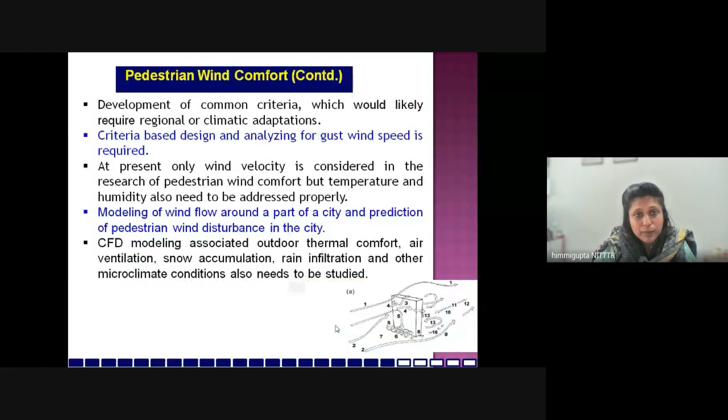Then there is something called an interference effect, wherein wind tunnel CFD studies can help, because there are tall buildings side by side. So when a high wind is blowing, there is some interference which happens, which is what we are seeing here now. This is all because of tall buildings. So this kind of discomfort also has to be looked into. Pedestrian comfort and everything, geometric considerations. Of course, we go for streamlined designs and everything.

Okay. So that's how these buildings are made. There are special analyses, of course, which are done. Then air pollution has more effect at the top stories. So these things have to be looked into. Okay. So which brings us to, of course, the topic which I had already introduced to you: sustainable infrastructure development. So we have to go with the environment now.

Okay. So this should include not only sustainability in terms of materials and environment, but social inclusion should be there. Infrastructure that includes all of society. Citywide expansion should be consistent with urban growth. A problem we are facing every year now, in cities like Bengaluru, Chennai, and this time, I stay in Chandigarh and around. Even I could feel with the rains how the city was flooded, which just showed how the drainage was not properly planned. The cities are just coming up in a haphazard manner.

So the natural drains, we are all choking them. We are all blocking the natural drains of the water. So we have to understand how infrastructure develops. As structural engineers, we also have to keep these things in mind when planning happens. We should be a part of it. So all these kind of things have to be there. Okay.

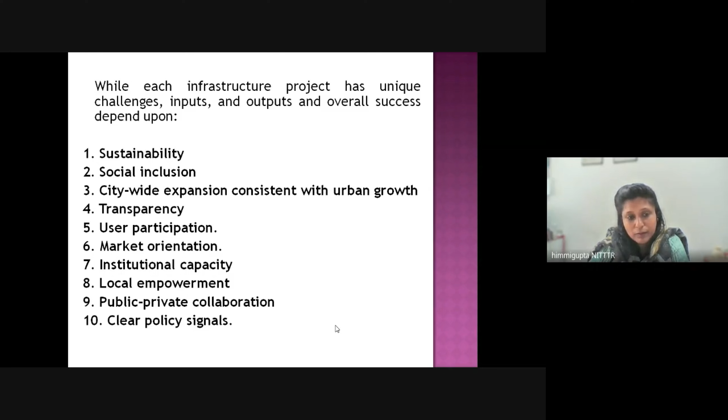So of course, resources are less, but more people to feed. So there are many technologies which are there. So these are the five main: minimize material use, minimize material production energy, minimize embodied carbon or energy, life cycle analysis. Try to have maximum structural system reuse. Even after the building has surpassed its design time, if the structural system can be reused for the next building, just try to use that. So less and less material should be wasted.

Okay. So of course there is no single methodology, but there are many ways to do it, and there's also a dedicated session in the afternoon for the sustainable structural engineering practices only. Okay. So as structural engineers, now we are supposed to know which material has what embodied carbon in it, what is the embodied energy in it, and its life cycle analysis has to be known. Okay.

So for designers, you should understand what is embodied carbon, where it originates, how buildings impact the amount of carbon in the environment, and if there is excessive carbon, what will be the consequences. Then we have to accurately know and robustly track the quantities of the structural elements.

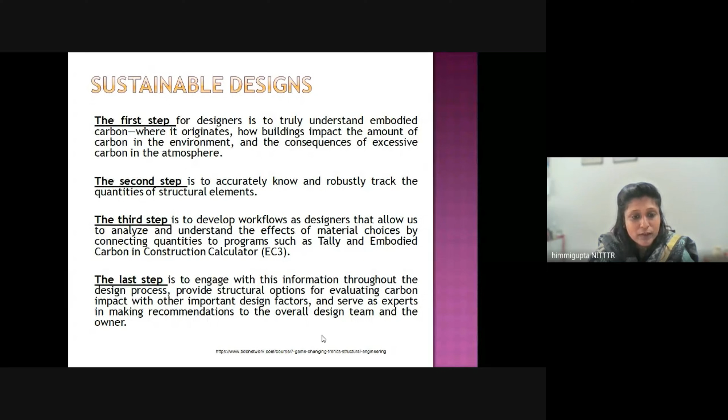Okay. Then we have to develop workflows as designers that allow us to analyze and understand the effects of material choices. Okay. Then, with this information throughout the design process, I have to go for options that keep evaluating the carbon impact and other important design factors so that I have minimum embodied carbon for my particular building.

Okay. So what this SE 2050 is, basically the structural engineers around the world have formed this kind of an understanding, just like we have the Montreal Protocol, Kyoto Protocol. So they have made this group wherein they are trying to say that for the structural engineering community, the new buildings that will come up now will have reduced carbon emissions.

Okay. So try to use salvaged recycled material, zero waste practices, as I already discussed with BIM and the digital platform, single model and everything. So there will be zero waste if the designer is already in touch with the contractor. They're coordinating, they're using the same model, same file. So proper things will happen.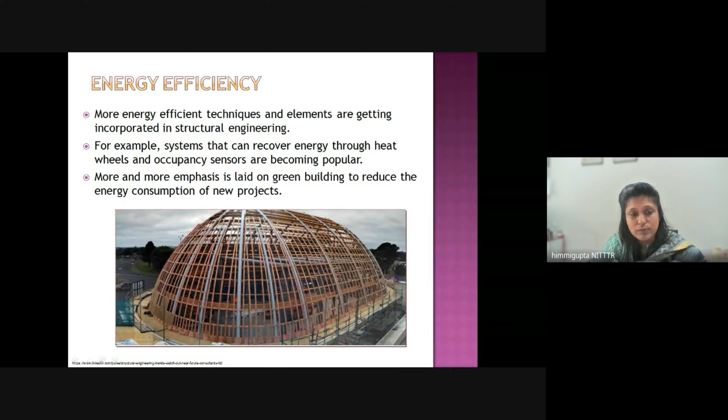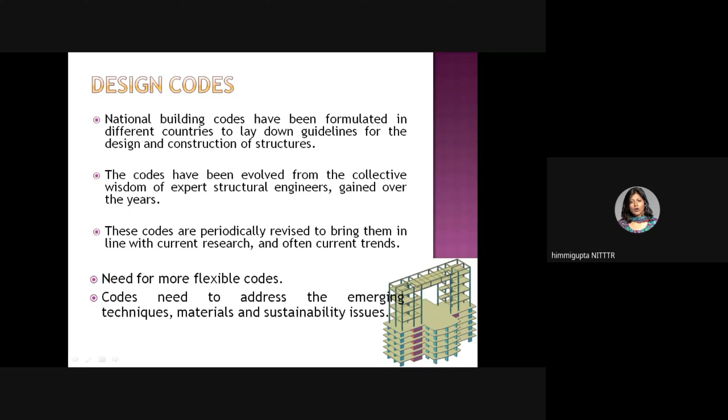So the idea is the code should be flexible, and at the same time, it should address the emerging techniques, materials, and sustainability issues also. Okay, so when I'm talking of trends in design and analysis, there has been a lot of development in the last 80 years. Code strength formulations have become more detailed, more research findings are now being incorporated into code. Second order advanced analysis is coming up as a major requirement now.

Okay, people are now going for design optimization, especially mathematical optimization, wherein for a real function we're trying to do maximization or minimization by having a systematic choice of input variables and computing the value of the function. So for this optimization in design, that's where artificial intelligence has started playing a very big role.

Okay, so these optimization algorithms are inspired by many nature-inspired processes around us, like genetic algorithms, the way Charles Darwin's theory works, survival of the fittest. You put in two variables, whichever fits the given criteria, those are used for a new variable, and that's how it goes on. Then evolution strategy, ant colony, how ants build their colony. Particle swarm, how swarms follow a pattern with which they are moving.

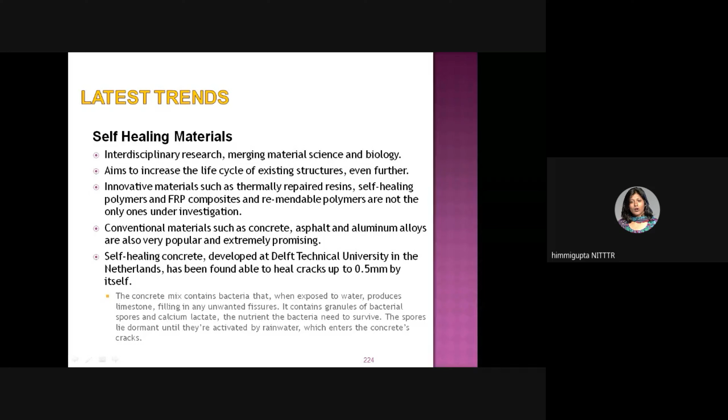Okay, yeah, so as I said, smart concrete I've already shown you. There are other smart materials also, like shape memory alloys, SMAs. Okay, so they are also picking up a lot. So basically, in case there is any change in the material property, geometry, mechanical or electromagnetic response, the material is able to sense it. Okay, so both sensor and actuator functions are there, they give feedback, they have to be integrated, and this is playing a very big role in structural health monitoring these days. So sensors are being embedded within structures to monitor stress and damage. This can reduce maintenance cost and increase lifespan. Okay, so it has been used worldwide now.

Okay, as I said, sustainable structures are required. Okay, so the renewable energy sector. Buildings now need to start integrating renewable energy options. Your building should be able to do that. There are examples of very high-rise buildings, going very, very high, up to 80 meters or something, where the structural design incorporates windmills, so that the wind at height can be utilized. So as structural engineers, we have to start thinking about how we can generate renewable energy with our structures, and also how we can incorporate renewable energy for our structures, and use it and generate it also.

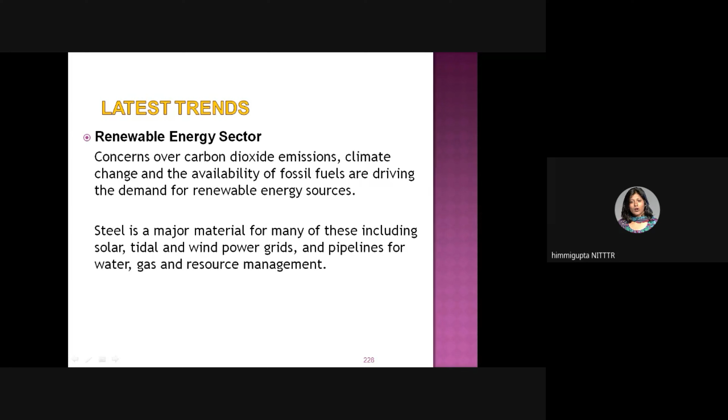Okay. Even with steel, there are a lot of things happening. In structural steel, many new grades have come up which are lightweight, cheaper, high strength. Okay. They were supposed to come by 2020, and actually many have come. Okay, and even the carbon dioxide breakthrough, there are a lot of programs so that carbon dioxide emissions from steel manufacturing itself can be reduced. So they are looking into the life cycle approach that I've already discussed with you. Okay, so reuse and recycling at every point of a product's life cycle, right from raw material extraction to recycling and end products.

Another trend which is picking up: we just looked at one example wherein a design firm was using the cloud for real-time data from the site. Even drones are being used. So drone mapping services can provide a very accurate view of a site as it exists. Okay. So during earthworks, during building foundations, real-time pictures, real-time data can come. For structural inspections, drones can be very helpful; at inaccessible places where humans cannot reach, drones can be sent. Okay. So even workers can be saved from risks, from things which are more risky. Okay, so drones can be sent there.

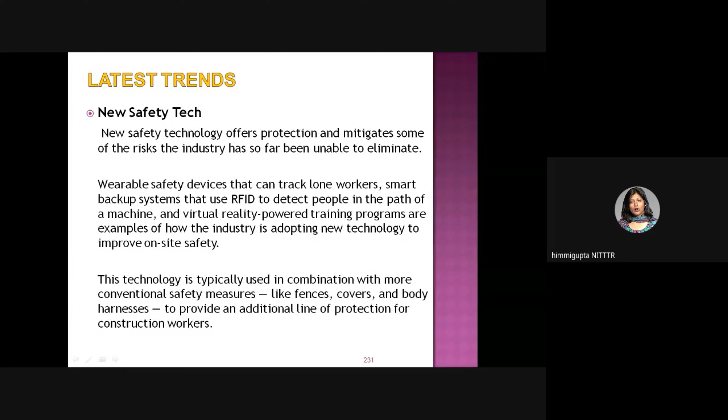Even new safety tech is coming up, wearable safety devices and all these kind of things. RFIDs are being used to detect people in the path of a machine. Virtual reality power training programs, they are being used. Okay, so fences, covers, body harnesses, all these kind of things, they are now coming up as safety technologies.

So there have been various revisions in the design standards also, which I just wanted to discuss a little. So this is just one thing: actually, as living things, we are influenced by various factors which are around us: international, political, economic, education, technology. So definitely, there have been so many changes. Nature of occupancy, high rises are coming, mixed occupancies are becoming more fashionable these days. People are talking of SOHOs, shop-cum-houses and all those kind of things.

So, nature of building services, there is a lot of dependence. New innovative construction materials, technologies, preservation of environment is becoming very, very important. There is need for planned management of existing building and environment. So, a lot of things have come up. So, just showing you this, I'm sure all of you must have read about it. So, this project is going quite good.

So, this is the world's highest railway bridge, which is on the Chenab river. So this is an arch bridge that is being constructed by railways. Okay, so basically the idea is, it is quite a very ambitious project, and what they have designed is the height above the river is 35 meters more than the height of the Eiffel Tower.

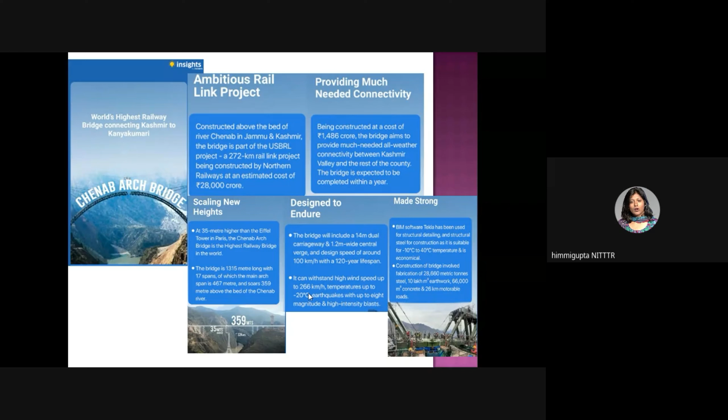So this is the kind of structure which has been designed, which is coming up, and its construction is in full sway. So for all these things, they have used BIM software, they have used Tekla. I've already mentioned these things to you. Tekla was for fabrication. So we can see how these things are coming up in India also. Very good projects. So this is the latest picture of this only. It is coming up. This picture was taken, I think, a month or two back, which I have included now.

The same Chenab Bridge. Okay, then other 8-lane longest extradosed bridges are also coming; people who are actually into bridge engineering, they would appreciate that. Extradosed bridges are actually structurally very superior performing, a lot of material saving, lot of space saving. So there is one which is coming up, 2.2 kilometers long, over the Narmada River. So people who are interested in structural engineering, they can follow these kind of trends.

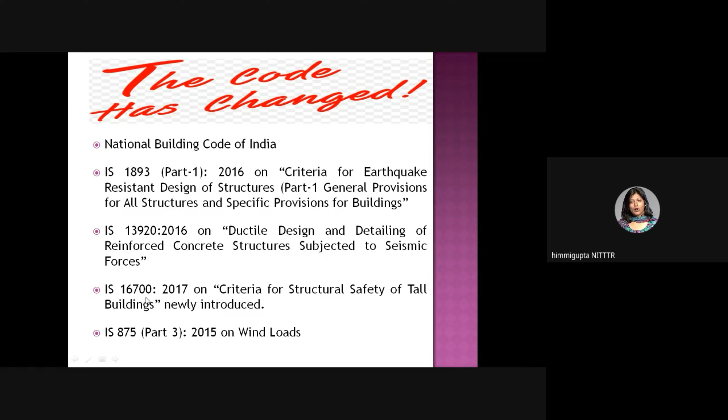Okay, so for the code also, new formwork techniques, faster construction materials have been included, proof checking, peer review. So all these things, they are being introduced in India now. So recently all these codes have changed. I'm sure everyone must be conversant with it by now. So, as I had already mentioned, 16700. This was the new code which has been introduced, criteria for structural safety of tall buildings.

Okay, so NBC, the new thing which has happened: if we see our NBC, many times structural engineers, we are not referring to NBC. So it is a very useful document which must be looked into as well. So already NBC, if you see the way they have given the guidelines, they talk of sustainability. But in the 2016 version, it has been included more exclusively also. So if you're following NBC, your buildings will be sustainable, which is actually the new requirement.

So basically, they are going for structural safety certification that has been made mandatory. So for structural engineers, it's an important thing. So from a competent professional, they say you have to ensure the structural safety of the building, peer review of design, accessibility for persons with disability and elderly. So your design should include all these aspects, provision on fire and life safety. So all these things are now being made mandatory in NBC. Latest structure loading, design, construction, all plumbing and everything, new alternative materials, they are stressing on that.

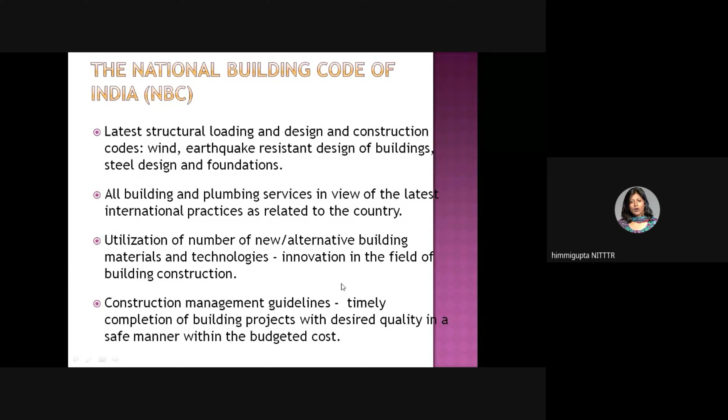Construction management guidelines talk of structured use of glass, escalators, moving walks, solid waste management, asset and facility management. So just listing a few, as per new IS 13920, minimum dimension of column has been set as 20 times diameter or 300 mm. We should know all these things when we are picking up the code.

I don't want to go into a lot of detail, but these were the major changes. Minimum column width has changed for the beams: 20 bars need 400 mm, 25 bars need 500 mm. These are all structural ductile detailing requirements. If you are going for bent up bars or inclined links in concrete and RC sections, you also have to check the shear force. All these things are new and have to be incorporated.

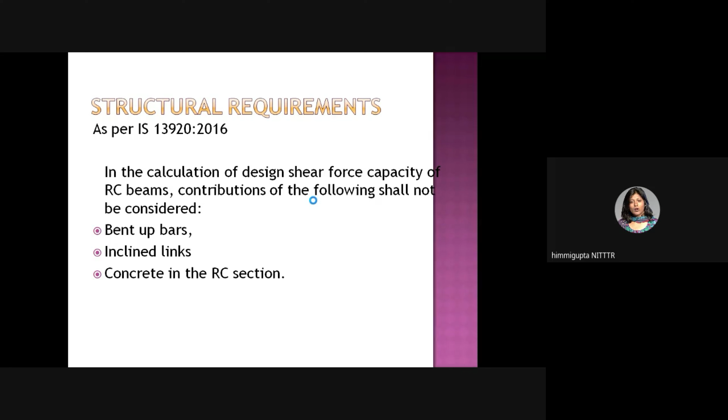These provisions have been here for 4-5 years now, but still many times we see that the awareness is not there for the new code. So our children should actually be given knowledge for these things.

IS 1893, how to calculate the earthquake loads, that has changed. As far as possible, structures should be able to respond without structural damage to shocks of moderate intensities, and without total collapse to shocks of heavy intensity. That is what is required. We don't say the structure will not even have a single crack if an earthquake happens. We don't want to unnecessarily overestimate and add unnecessary factor of safety, which will make it very uneconomical. We know the earthquake probabilities are low.

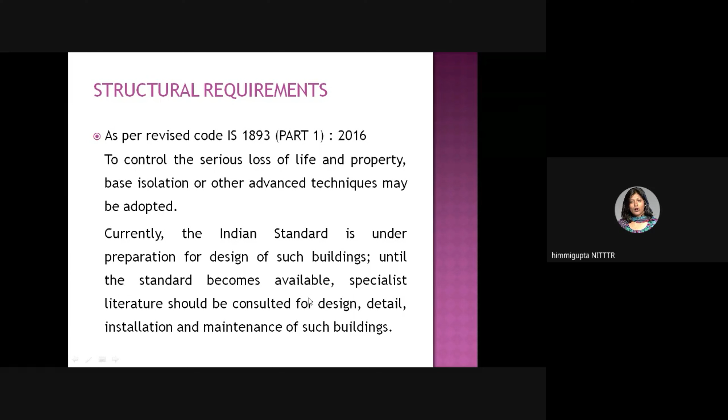Even for tall buildings, they are coming up with a new code. Base isolation and energy absorbing devices are being advocated. Only with detailed experimental data should you go for non-standard devices. They are saying you must do detailed analysis - dynamic analysis has been made mandatory for many cases, based on the zone, story heights, and everything.

Even the importance factor has been revised. Earlier it used to be just 1 and 1.5. Now 1.2 has also been introduced.

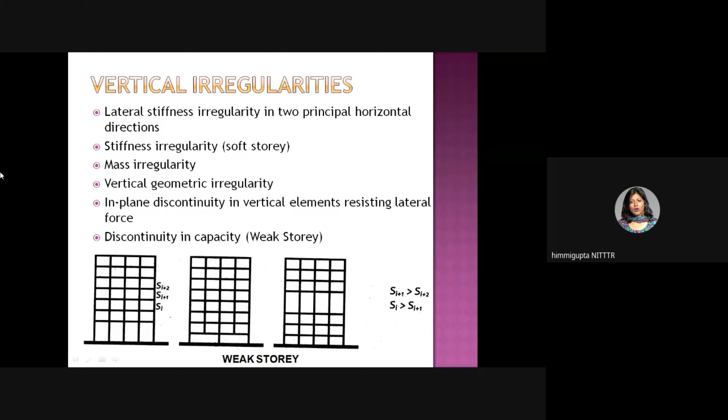Even for irregular buildings, they have spelled out a lot of irregularities, like vertical irregularities due to lateral stiffness, soft stories, mass, vertical geometry, in-plane discontinuity, and discontinuity in capacity like weak story. Plan irregularities like torsion, re-entrant corners, and out-of-plane offsets are also covered. There are very explicit diagrams now addressing all these issues and how they have to be considered for a design.

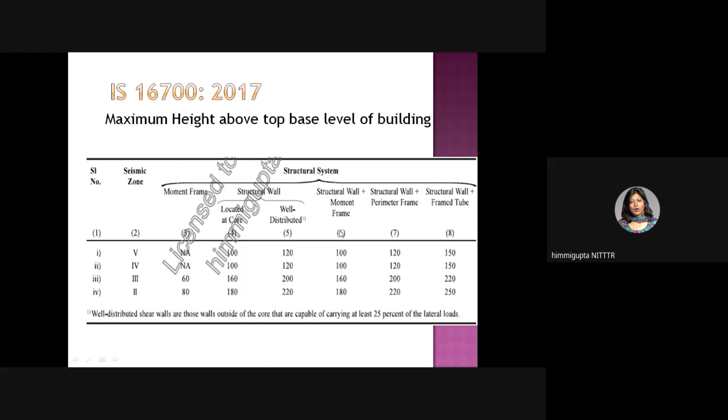For tall buildings, the code is IS 16700, applicable for height greater than 50 meters but less than 250 meters. More than 250 meters, they call that a super tall building. These are the kind of structural systems being advocated for various seismic zones and heights. Plan aspect ratio becomes important here - it cannot exceed 5. Slenderness ratio has also been limited in this way.

As I said earlier, it was separate, but now everyone is involved with everyone - it's not that one person will not have any interaction with another. Everyone is involved with everyone, as we have been seeing. So many things are happening with our growing economy, and there are many new developments coming.

There are projects like Gati Shakti coming up, which is a national master plan for infrastructure development. What they are trying to do is involve a lot of GPS data and 16 ministries including railways and roadways, so everyone will do integrated infrastructure development that is all coordinated. The kind of problems we are facing these days with cities flooding and everything - that will not happen.

There are 200 plus layers of geospatial data on existing infrastructure. Various government departments will track, in real time and at one centralized position, the progress of various projects, so budgets and people can be prioritized. This will also cut down logistic costs.

The idea is that there is a new road constructed by one department, and a few days later another department digs up that very road to lay water pipelines. That is nothing but a lack of coordination, which is why this has happened. That's what's being tackled by this kind of project - that's the master plan they are trying to have.